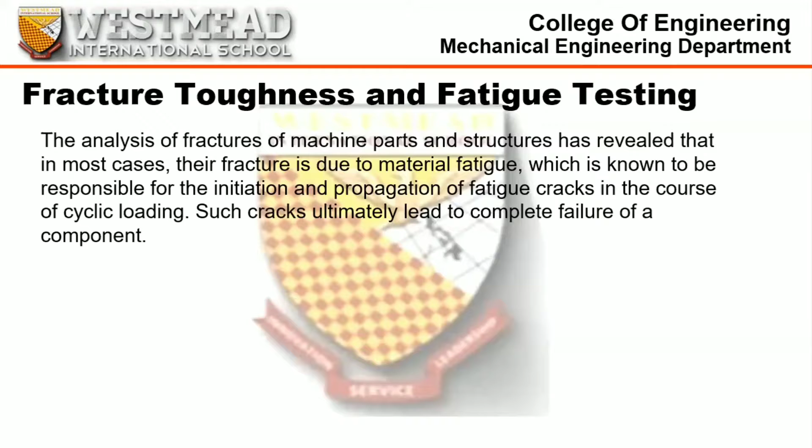A number of standardized tests have been devised to measure the fracture toughness values for structural materials. In the United States, these standard test methods are developed by the ASTM, known as the American Society for Testing and Materials.

Procedures and specimen configurations for most tests are relatively complicated, and we will not attempt to provide detailed explanations. In brief, for each test type, the specimen of specified geometry and size contains a pre-existing defect, usually a sharp crack that has been introduced. The test apparatus loads the specimen at a specified rate and also measures load and crack displacement values. Data are subjected to analysis to ensure that they meet established criteria before the fracture toughness values are deemed acceptable.

Most tests are for metals, but some have also been developed for ceramics, polymers, and composites.

So what is impact testing? Fracture mechanics is a scientific discipline. Impact testing techniques were established to ascertain the fracture characteristics of materials at high loading rates. It was realized that the results of laboratory tensile tests at low loading rates could not be extrapolated to predict fracture behavior. For example, under some circumstances, normally ductile metals fracture abruptly and with very little plastic deformation under high loading rates.

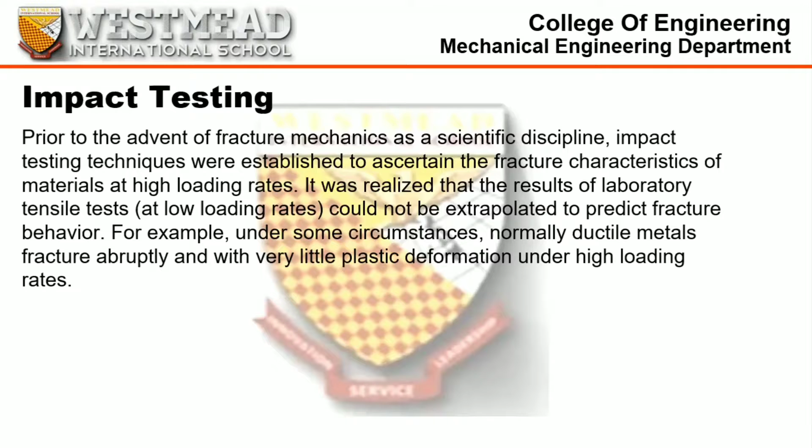Impact test conditions were chosen to represent the most severe conditions related to the potential for fracture. The first one is deformation at a relatively low temperature. The second is a high strain rate, for example the rate of deformation. And the last one is the triaxial stress state, which may be introduced by the presence of a notch.

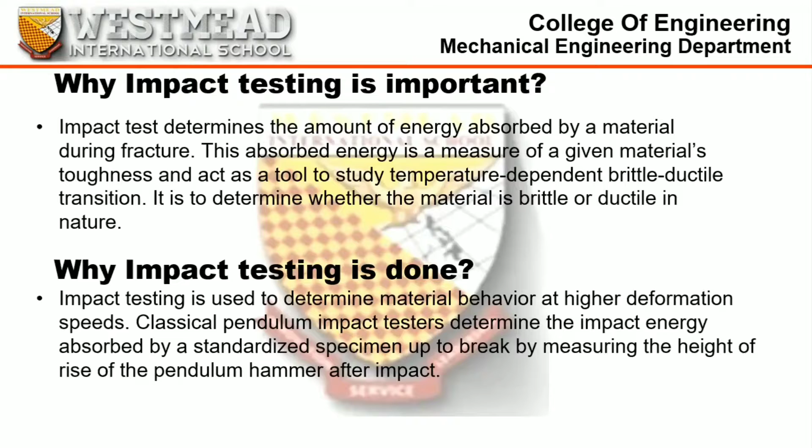Why is impact testing done? Impact testing is used to determine material behavior at higher deformation speeds. Classical pendulum impact testers determine the impact energy absorbed by a standardized specimen up to break by measuring the height of rise of the pendulum hammer after impact.

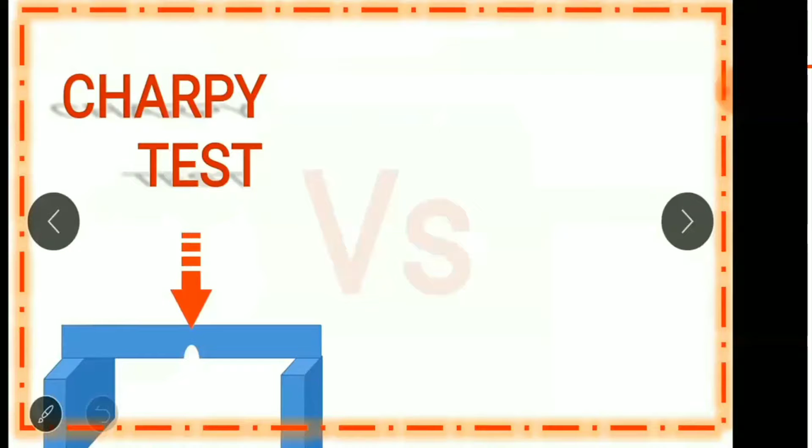Types of impact testing. There are two kinds of impact testing, the Izod test and the Charpy test. In this video, I will discuss with you the difference between these two tests.

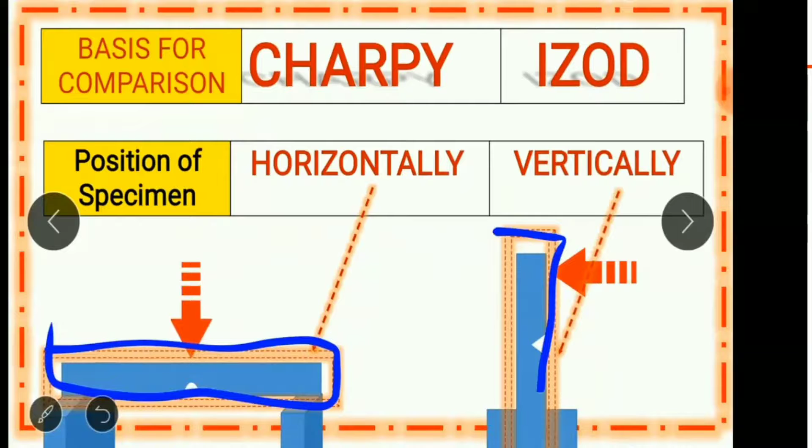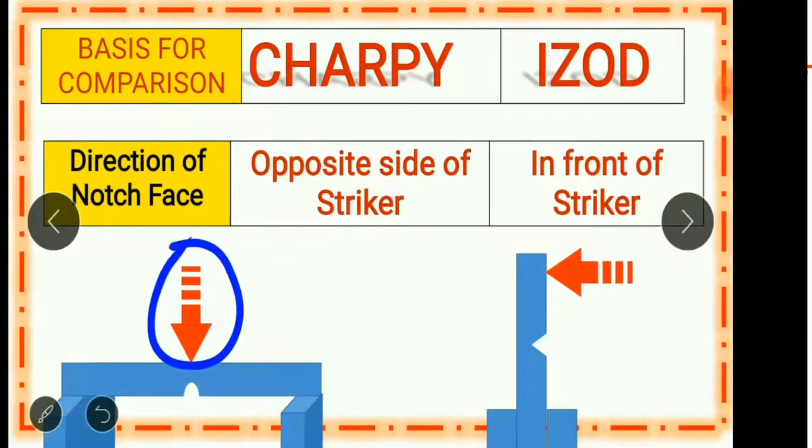Based on the direction of the notch face, the Charpy test has the notch on the opposite side of the striker, while on the Izod test, the notch is in front of the striker, or on the same side.

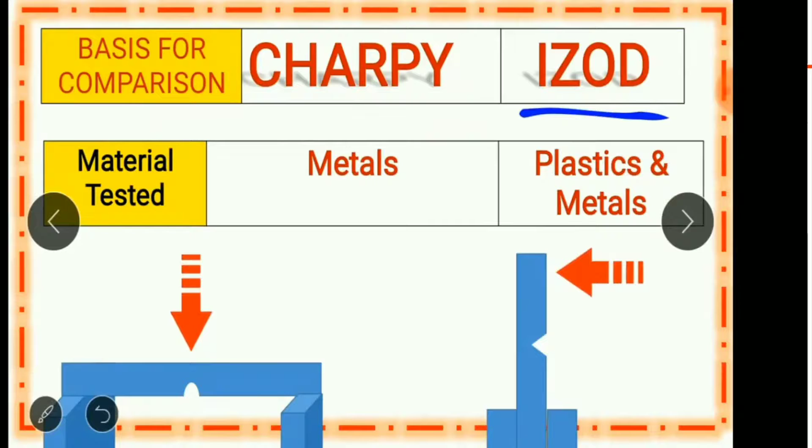The ductile to brittle transition is related to the temperature dependence of the measured impact energy absorption. This transition is represented for a steel by a curve. At a higher temperature, the CVN energy is relatively large, corresponding to a ductile mode of fracture. As the temperature is lowered, the impact energy drops suddenly over a relatively narrow temperature range. Below that range, the energy has a constant but small value, meaning the mode of fracture is brittle.

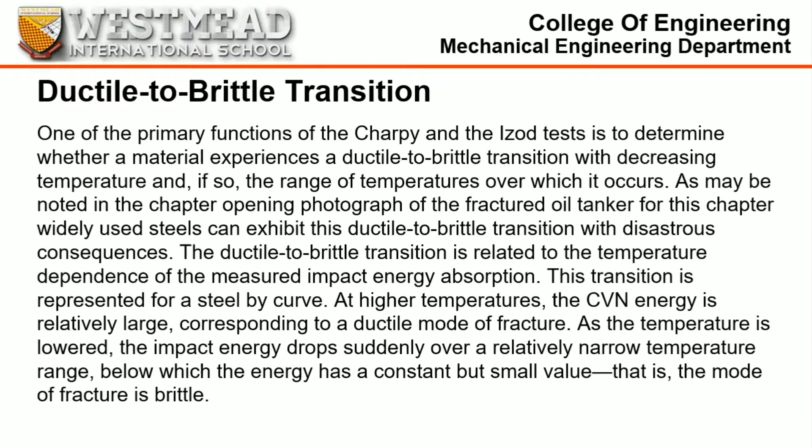This means the ductile to brittle transition is affected by temperature. As the temperature goes lower, the impact energy drops suddenly. This graph represents the ductile to brittle transition, showing the energy absorbed on impact against temperature.

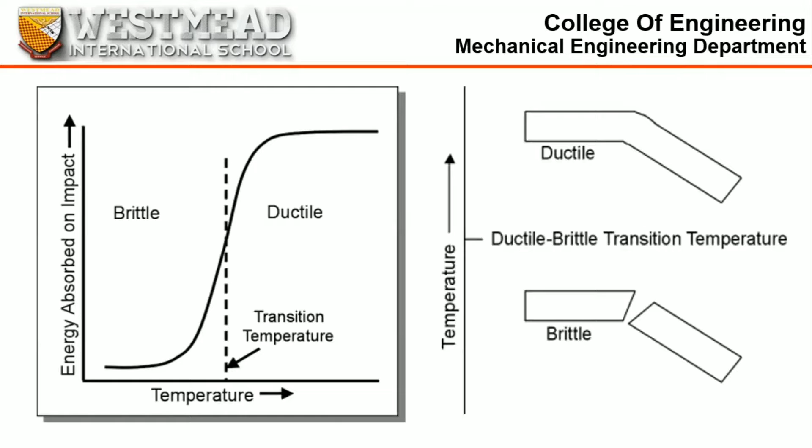At low temperatures, some metals that would be ductile at room temperature become brittle. This is known as the ductile to brittle transition. The transition temperature is strongly dependent on the composition of the metal. Steel is the most commonly used metal that shows this behavior. For some steels, the transition temperature can be around 0 degrees Celsius, and in winter, the temperature in some parts of the world can be below this. As a result, some steel structures are very likely to fail in winter.

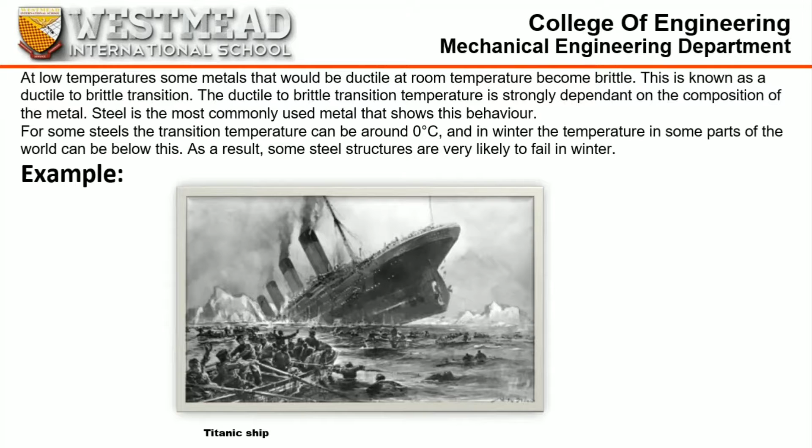The next topic is destructive testing. Destructive testing is undertaken in order to understand a specimen's performance or material behavior. These procedures are carried out to the point of the test specimen's failure. Destructive testing procedures can either follow specific standards or can be tailored to a particular set of service conditions. Destructive testing methods are commonly used for materials characterization, fabrication validation, failure investigation, and engineering critical assessments.

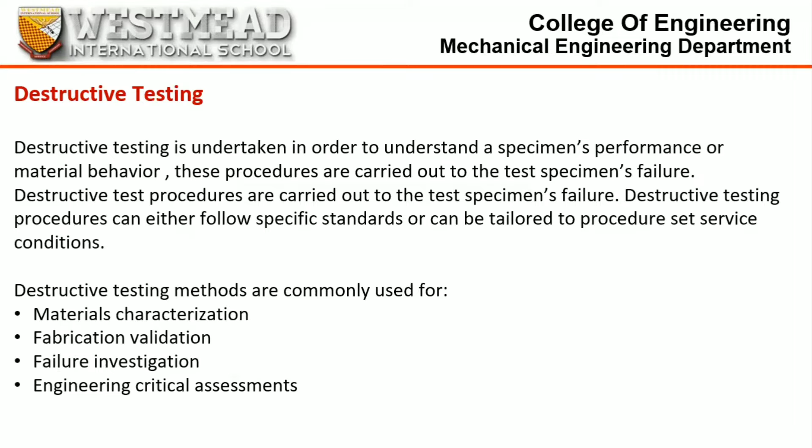Types of destructive testing: the first one is aggressive environment testing. This includes fracture and fatigue testing in sour, sweet, and other corrosive environments, across a range of temperatures and pressures. These tests allow industries to assess the impact of these conditions on material performance.

The next one is corrosion testing. This covers non-toxic, small-scale, aqueous corrosion testing in a variety of different environments, including fresh and seawater.

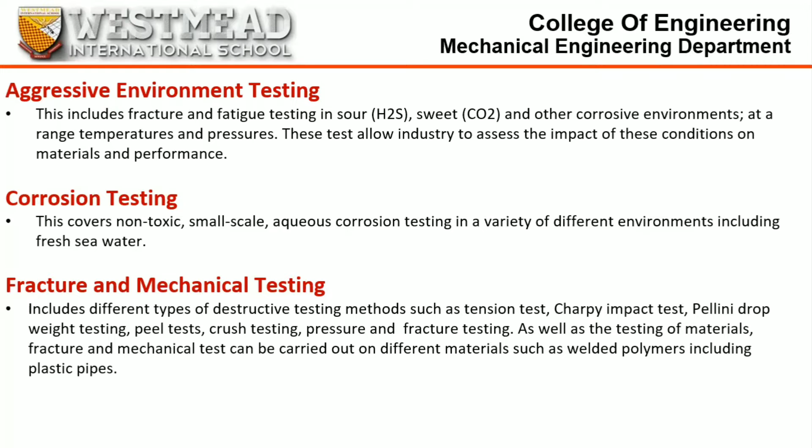Fracture and mechanical testing includes different types of destructive testing methods such as tension test, Charpy impact test, Pellini drop weight testing, peel tests, crush testing, pressure and fracture testing, as well as testing of materials. Fracture and mechanical tests can be carried out on different materials such as welded polymers, including plastic pipes.

Fatigue testing is performed in air or seawater environments. These tests are used to assess parent materials and the endurance of welded joints under constant or variable amplitude loading. These destructive testing methods can also be used for fatigue crack growth testing of welds, base metals, and heat-affected zones.

The next one is hydrogen testing. This type of testing covers materials that are at risk of corrosion from exposure to hydrogen, similar to corrosion testing. This test can be carried out at a variety of different temperatures and strain rates.

The last one is residual stress measurement. Residual stresses are those that remain in a solid material after the original causes of any stresses have been removed. This can be intentional, such as with scratch-resistant glass on smartphones, or unintentional, which can lead to premature failure of a structure. Measurement of residual stresses allows designers and engineers to determine factors like near-surface and through-thickness residual stress distribution, which can be used in engineering critical assessments.

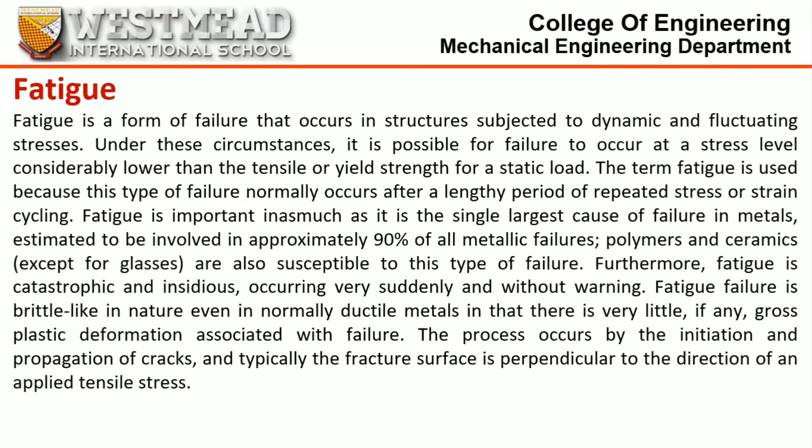Fatigue properties of materials are often described by the fatigue limit or the S-N curve. This is the S-N curve, or the Wöhler curve. It describes the relation between cyclic stress amplitude and number of cycles to failure. S-N curves are derived from the fatigue test. The tests are performed by applying cyclic stress with a constant amplitude on the specimen until failure of the specimen.

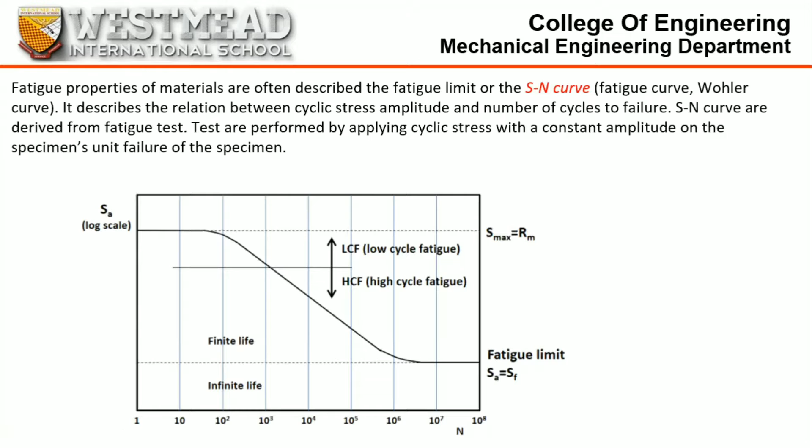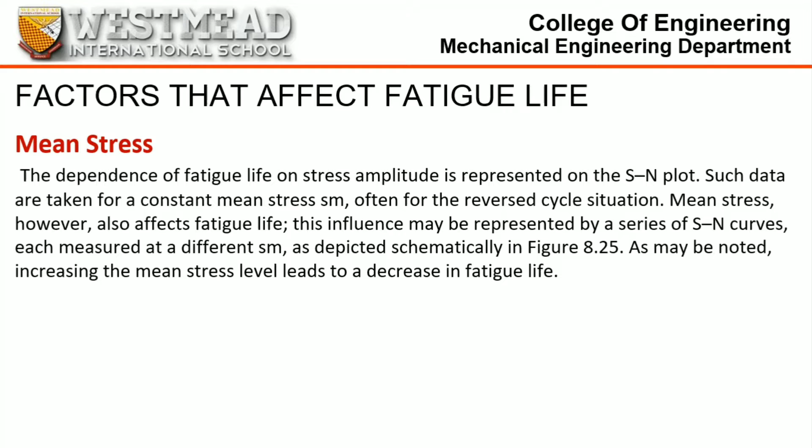The next one is the surface effects. For many common loading situations, the maximum stress within a component or structure occurs at its surface. Consequently, most cracks leading to fatigue failure originate at surface positions, specifically stress amplification sites. Therefore, it has been observed that fatigue life is especially sensitive to the condition and configuration of the component surface. Numerous factors influence fatigue resistance, the proper management of which will lead to an improvement in fatigue life. These include design criteria as well as various surface treatments.

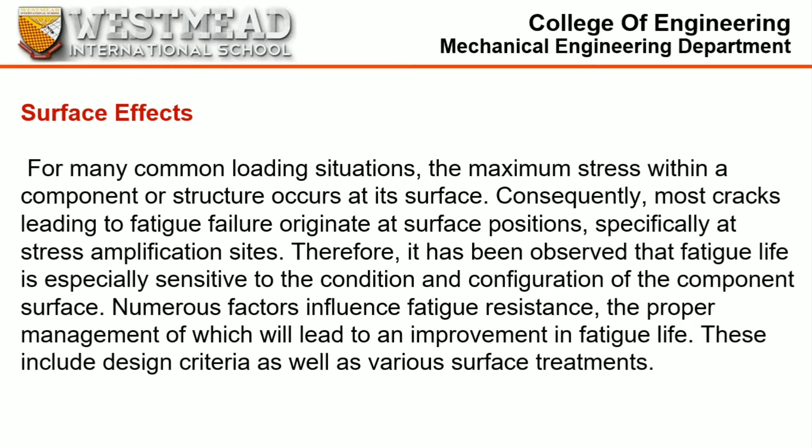Next is the design factors. The design of a component can have a significant influence on its fatigue characteristics. Any notch or geometrical discontinuity can act as a stress raiser and fatigue crack initiation site. These design features include grooves, holes, keyways, threads, and so on. The sharper the discontinuity, for example, the smaller the radius of curvature, the more severe the stress concentration.

The probability of fatigue failure may be reduced by avoiding these structural irregularities or by making design modifications by which sudden contour changes leading to sharp corners are eliminated. For example, calling for rounded fillets with large radii of curvature at the point where there is a change in diameter for a rotating shaft.

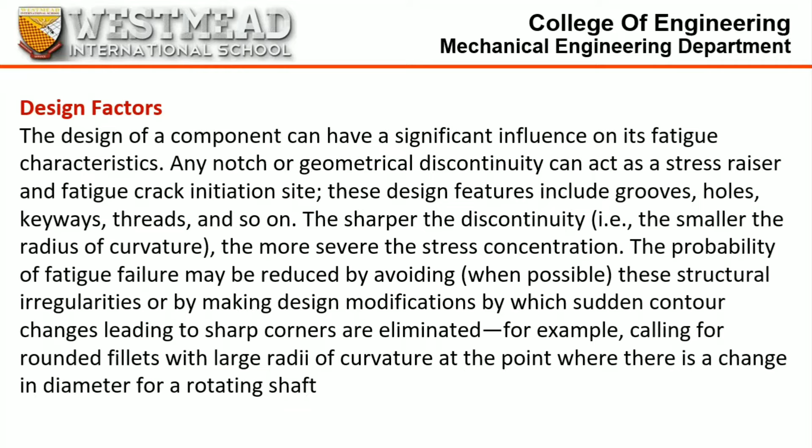Surface treatments. During machining operations, small scratches and grooves are invariably introduced into the workpiece surface by cutting tool action. These surface markings can limit the fatigue life. It has been observed that improving the surface finish by polishing enhances fatigue life significantly.

One of the most effective methods of increasing fatigue life performance is by imposing residual compressive stresses within the outer surface layer. Thus, a surface tensile stress of external origin is partially nullified and reduced in magnitude by the residual compressive stress. The net effect is that the likelihood of crack formation and therefore of fatigue failure is reduced.

Residual compressive stresses are commonly introduced into ductile metals mechanically by localized plastic deformation within the outer surface region. Commercially, this is often accomplished by a process termed shot peening. Small, hard particles of diameters within the range of 0.1 to 1.0 mm are projected at high velocities onto the surface to be treated. The resulting deformation induces compressive stresses to a depth of between 1/4 and 1/2 of the shot diameter. The influence of shot peening on the fatigue behavior for steel is demonstrated schematically.

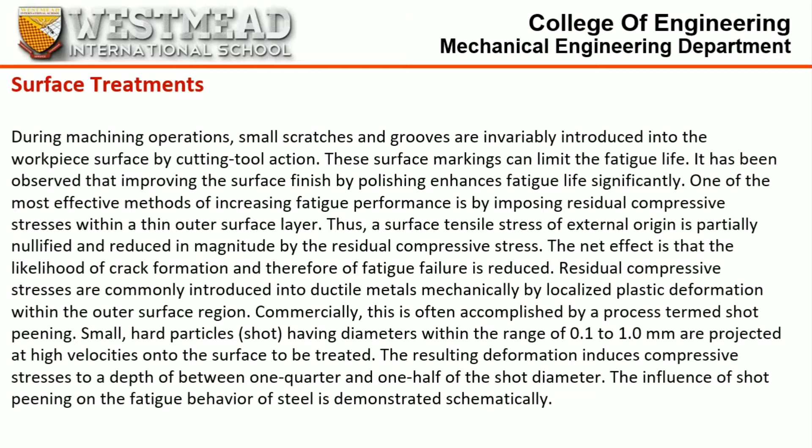Fatigue testing. It is defined as the process of progressive, localized, permanent structural change occurring in material subjected to conditions that produce fluctuating stresses and strain at some point or points that may culminate in cracks or complete fracture after a sufficient number of fluctuations.

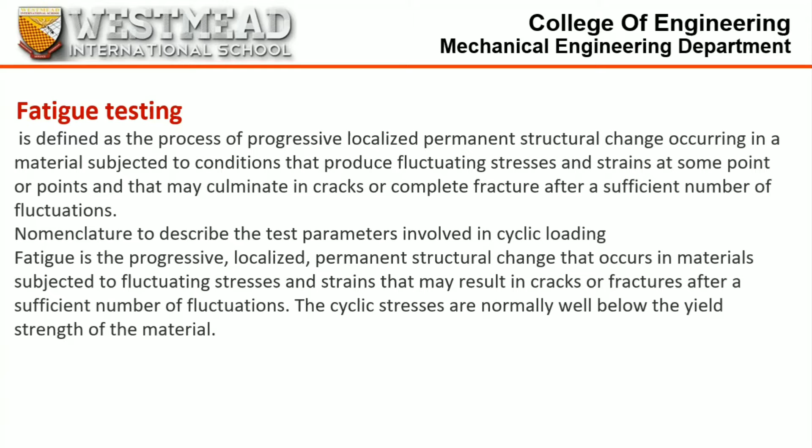Nomenclature to describe the test parameters involved in cyclic loading. Fatigue is the progressive, localized, permanent structural change that occurs in material subjected to fluctuating stress and strains that may result in cracks or fracture after a sufficient number of fluctuations. The cyclic stresses are normally well below the yield strength of the material.

The process of fatigue consists of three stages. The first stage is the initial fatigue damage leading to crack nucleation and crack initiation. The second stage is the progressive cyclic growth of a crack, or crack propagation, until the remaining uncracked cross-section of a part becomes too weak to withstand the loads applied. And the last stage is the final or sudden fracture of the remaining cross-section.

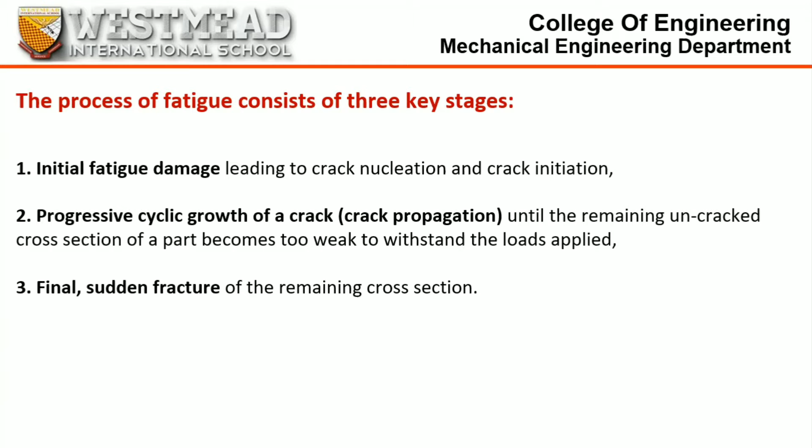These are the types of fatigue failure: mechanical fatigue, creep fatigue, thermomechanical fatigue, corrosion fatigue, and fretting fatigue. Mechanical fatigue is the fluctuations in externally applied stresses or strains, while creep fatigue is the cyclic loads at high temperatures.

Thermomechanical fatigue is the fluctuations in temperature as well as the stresses and strains. Corrosion fatigue is the cyclic loads in a chemically aggressive or embrittling environment. Fretting fatigue is the cyclic loads combined with frictional sliding.

Cyclic loading generally produces failure however low the stress may be. However, with some materials the S-N curve levels off, suggesting that for these materials, a limit of stress can be specified, known as the fatigue limit, below which infinite life can be expected. The fatigue limit is thought to be associated with the phenomenon of strain aging.

Most non-ferrous alloys do not show a fatigue limit. Instead, their S-N curve continues to drop at a slow rate, as in the dotted line. For these types of materials, the fatigue strength is quoted. This is the value of stress to which the material can be subjected for a given number of cycles.

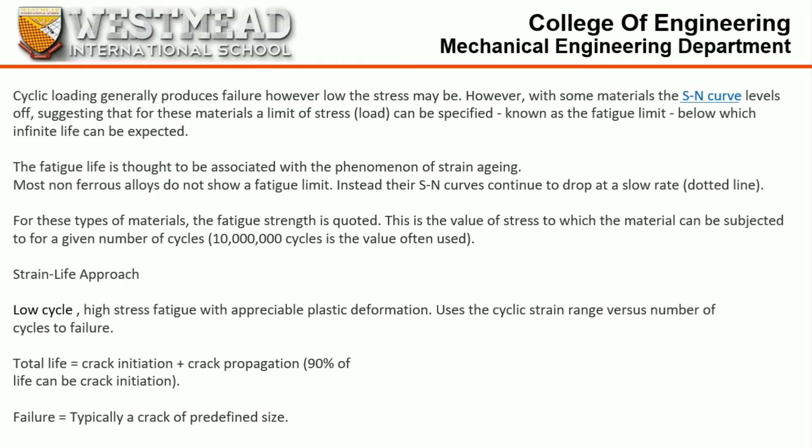Strain life approach. Low cycle, high stress fatigue with appreciable plastic deformation. So pag low cycle daw ay high ang stress fatigue. Uses the cyclic strain range versus number of cycles to failure. Total life is equal to crack initiation plus crack propagation. Failure is typically a crack of predefined size.

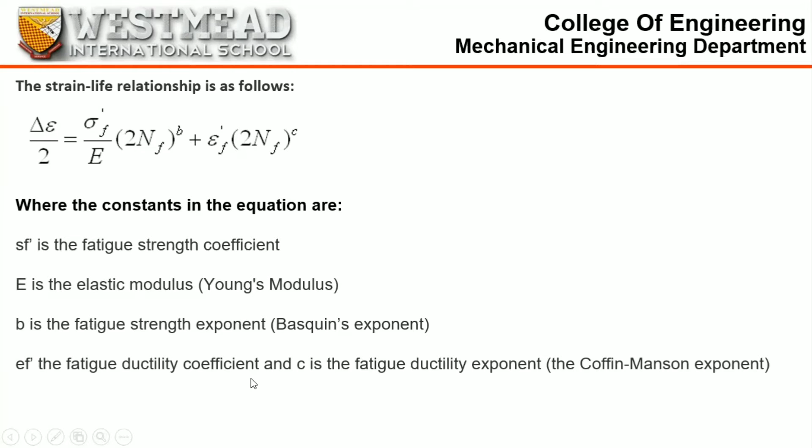The strain life relationship is as follows. So ito yung formula niya. Where the constants in the equation are: σf is the fatigue strength coefficient, E is the elastic modulus, b is the fatigue strength exponent, εf is the fatigue ductility coefficient, and c is the fatigue ductility exponent.

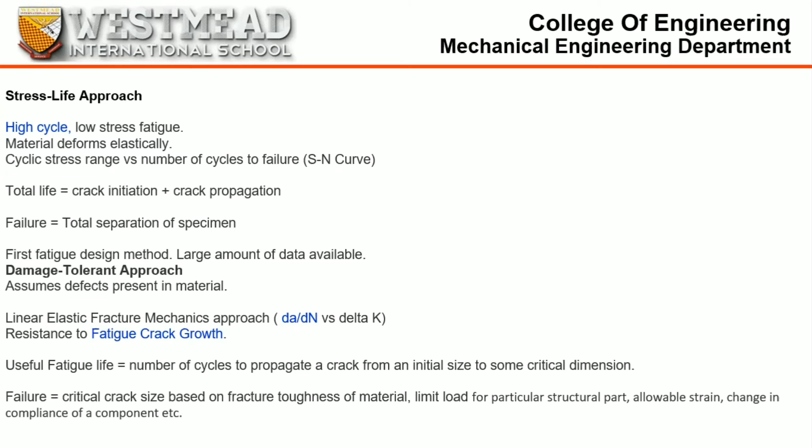For a clearer idea about fatigue and fatigue testing, here is a video presentation for you.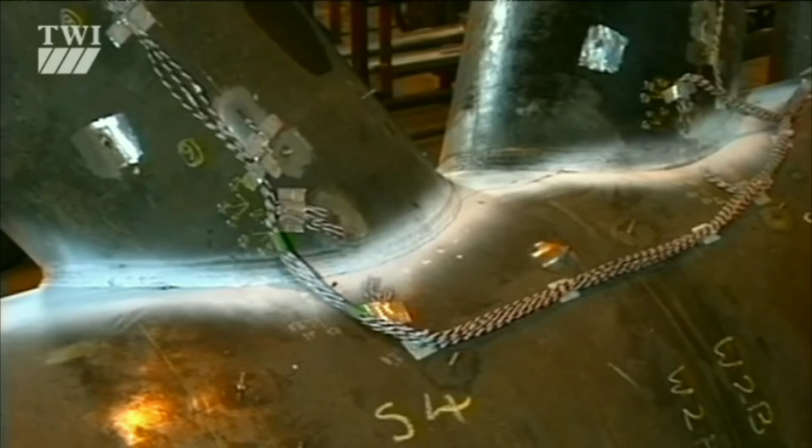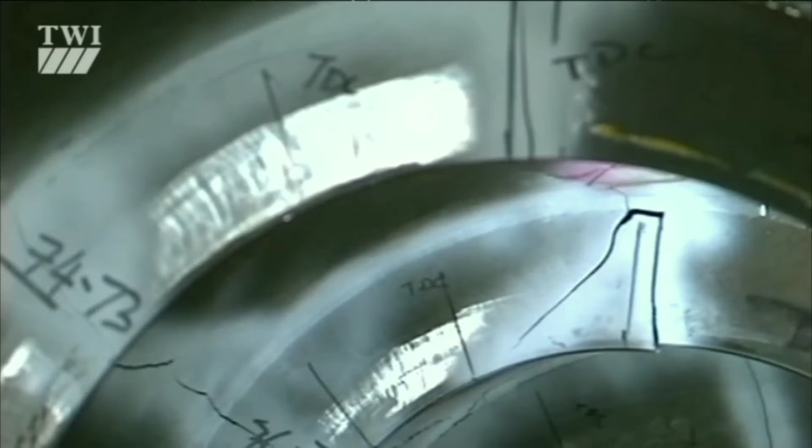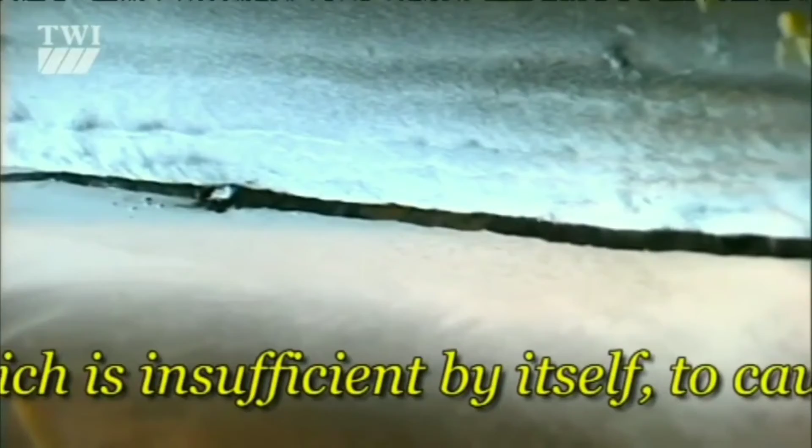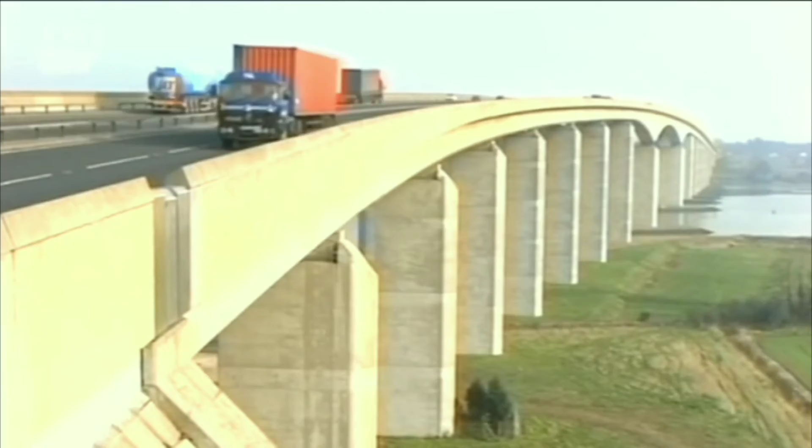Fatigue, variously defined as exhausting the strength or power of recovery, the deterioration of a material under repeated loading, and in the structural sense, the formation of a crack or cracks as a result of the repeated application of loads, each of which is insufficient by itself to cause normal static failure. Not one loading cycle, not 100 or a few thousand, but possibly millions and millions during the life of the structure. Examples exist throughout engineering. Structures large and small, dynamic and static. They all endure fatigue loading, and as such, have a fatigue life.

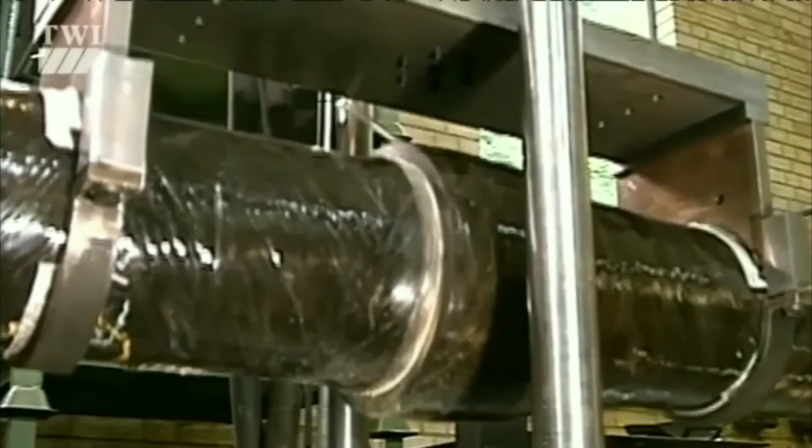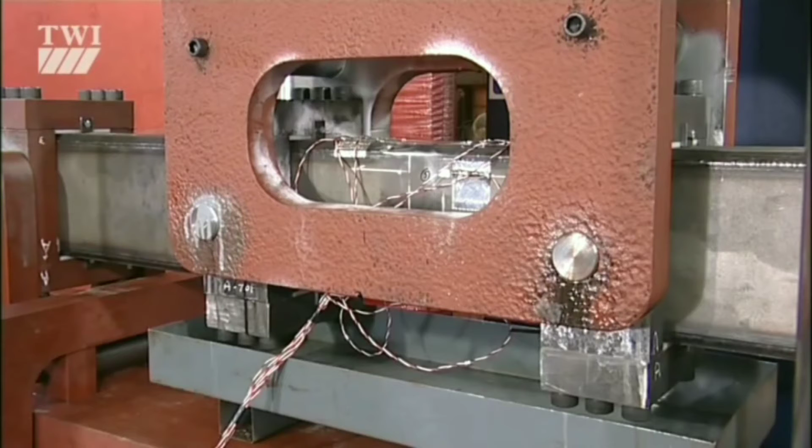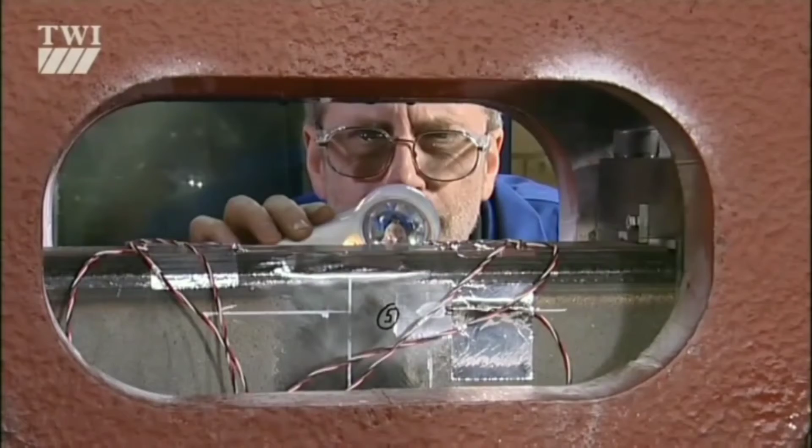We can examine fatigue cracking safely in controlled laboratory conditions. Take this beam, for instance, a model box girder in a 4-point bending test. The test machine applies a preset load once every 5 seconds. Now, although the stress developed is easily within the elastic range of the material, and the load sustained safely, repetition of the stress ultimately leads to cracking, often at welded joints. Because they appear after repeated loading, they're known as fatigue cracks.

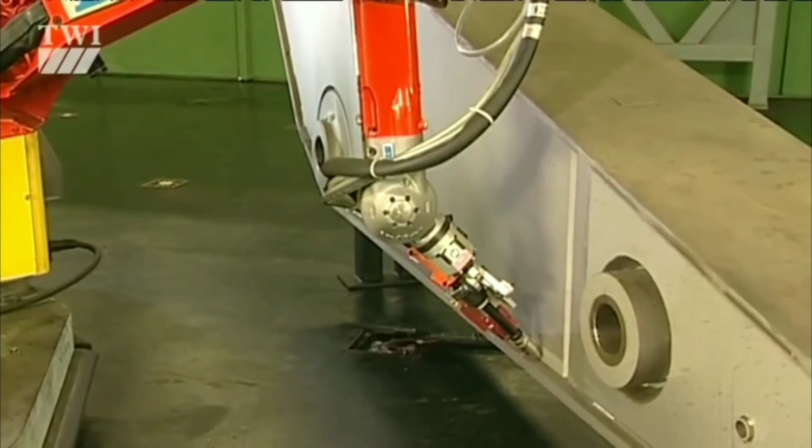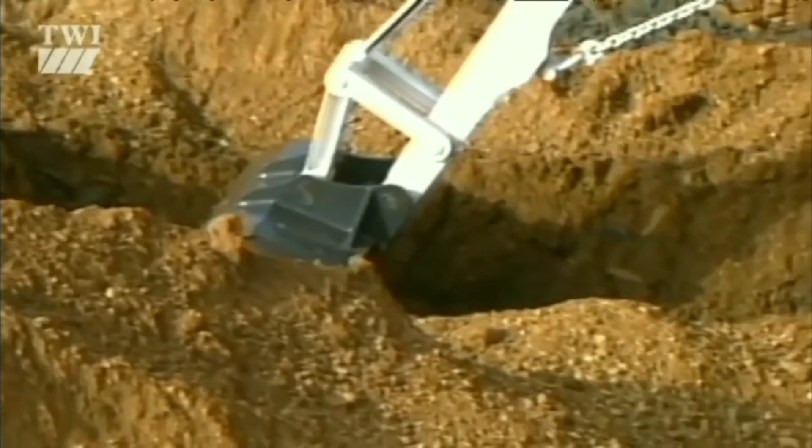Excavator components are largely welded fabrications. Parts are tacked together, then fully welded using MIG or submerged arc welding. In service, they're subjected to a heavy load every time the bucket digs into the ground, which, as we see, is pretty frequently. So the component's design, welding and inspection must reflect this fatigue loading.

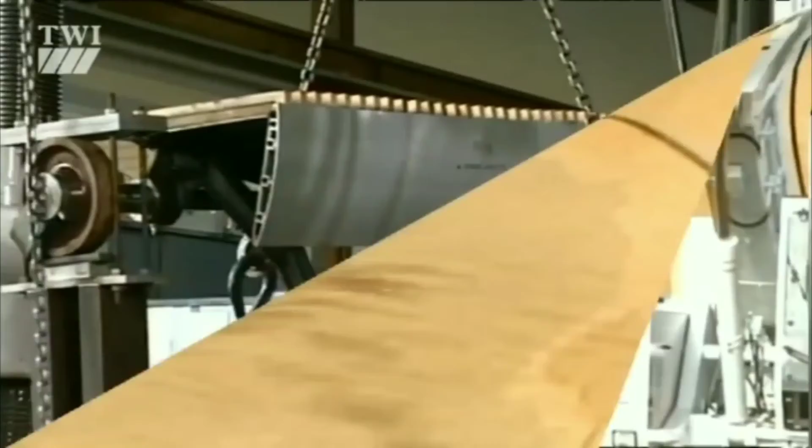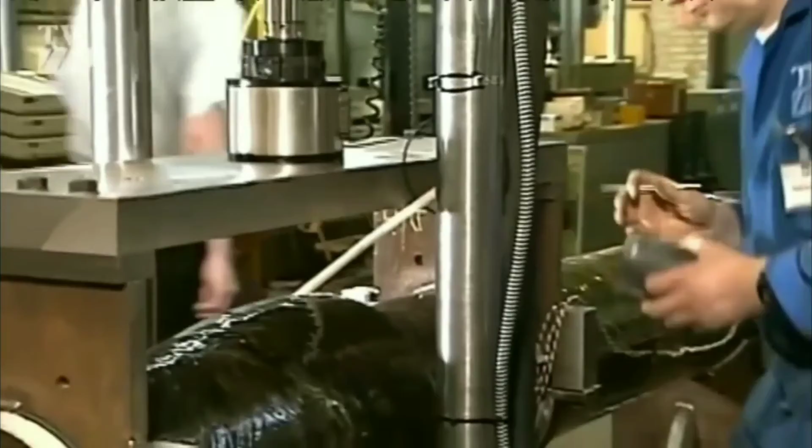Small portable parts can be tested in the severest conditions in the lab. But if the job is large and in full-time service, like a bridge support, a pipeline or an aircraft wing, then that's impossible. We need information at the design stage to predict the likely fatigue, wear and corrosion behavior of the structure. And we can gather this by laboratory tests of individual welded joints.

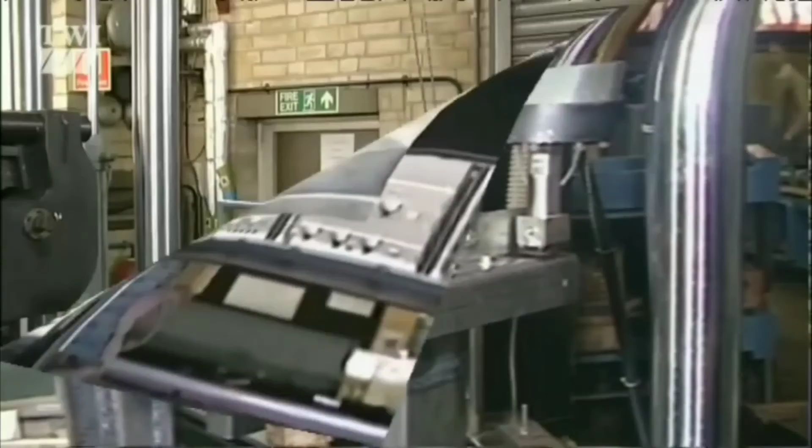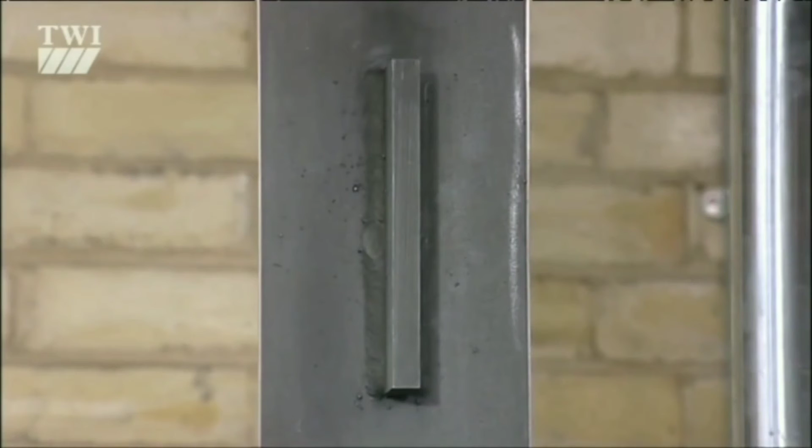Here we use a flat plate in simple tension with attachments on either side. The longitudinal fillet welds contribute little, but we'll see they pose a significant threat to the fatigue life of the specimen. But first, a simple tensile test. Elastic deformation is followed by plastic deformation, necking becomes evident and ductile rupture occurs at a load corresponding to the material's tensile strength. It leaves a characteristically irregular fracture surface.

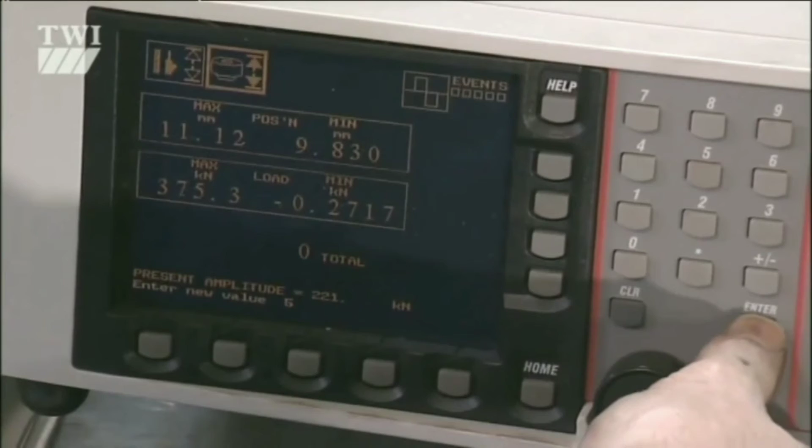Now, contrast this with a similar specimen in a fatigue test. A cyclic tensile stress is applied hydraulically. Eventually, it causes fatigue cracking, just here at the end of the weld. But the crucial thing is that this has happened at a stress well below the elastic limit. Here, fatigue cracking appears at the weld toe because of the local stress concentrations and also small weld imperfections.

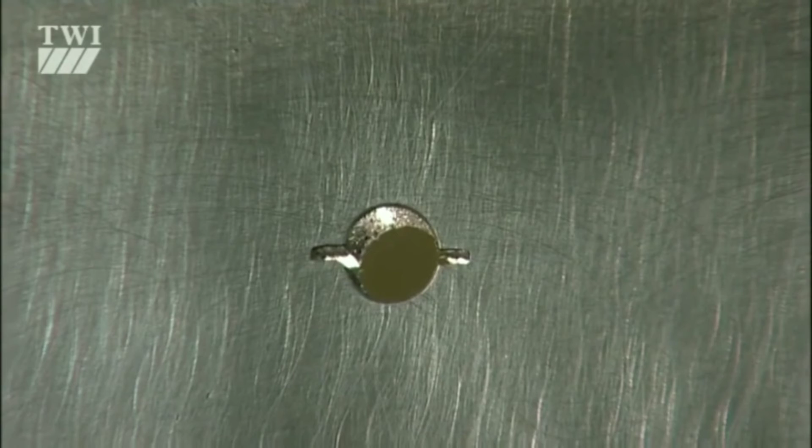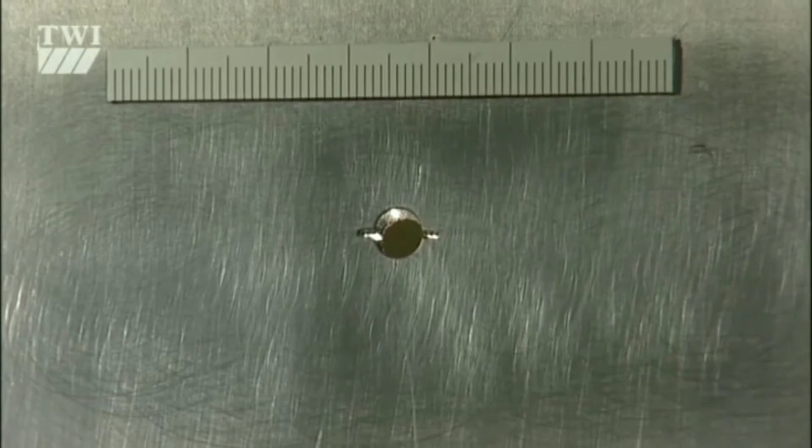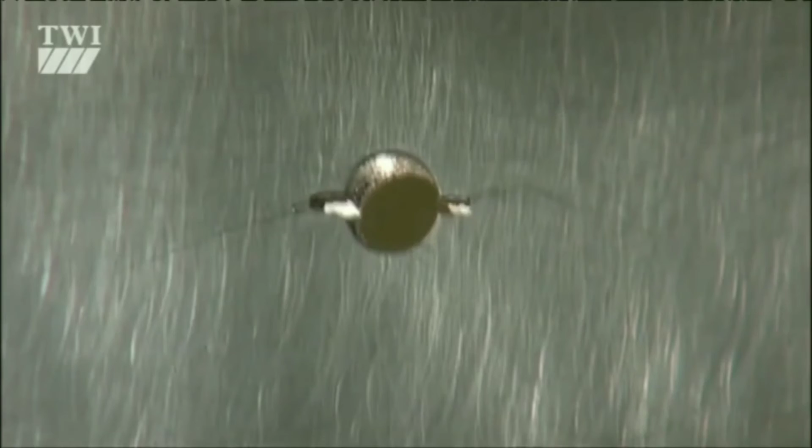We can clearly watch a fatigue crack growing by testing this aluminium plate specimen in a fatigue test machine. By compressing time, we can speed up the view of crack growth. The test piece has an artificial stress concentration so that the crack is located accurately. By polishing the surface, we can see the crack propagate. First 10 millimeters, then 30 millimeters, to final failure.

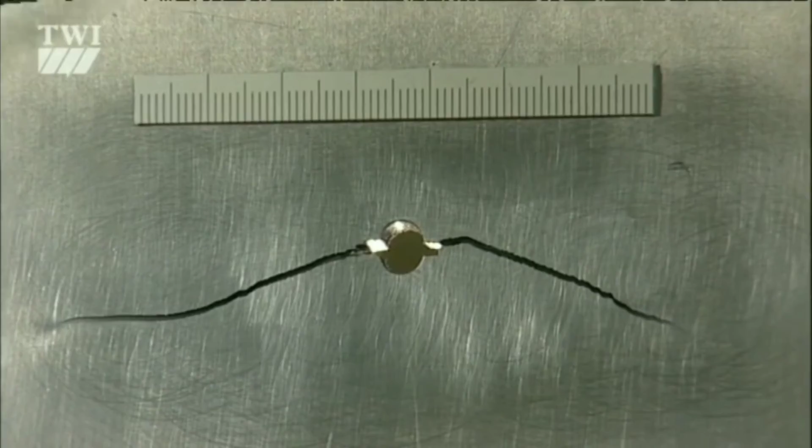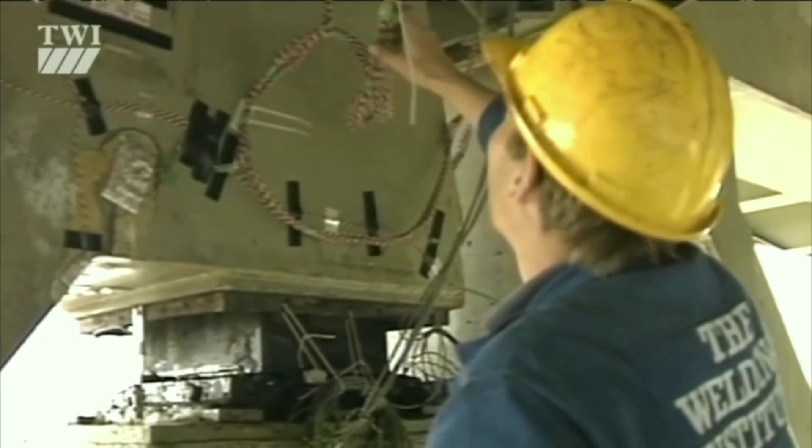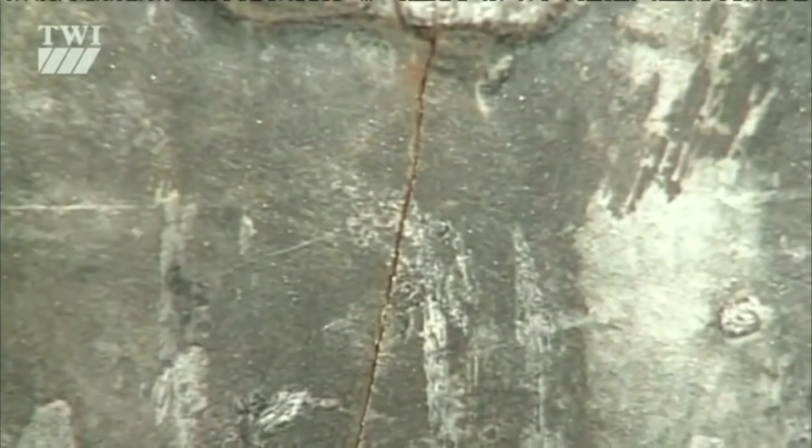So, in service, it's important to inspect for evidence of fatigue early in a structure's life, close to load-carrying members where the cross-section changes abruptly. Of course, rust, dirt or paint can make this site job a tough and onerous one. If it's not spotted, a crack will grow progressively until the remaining cross-section can no longer support the force applied and rapid ductile or brittle fracture occurs.

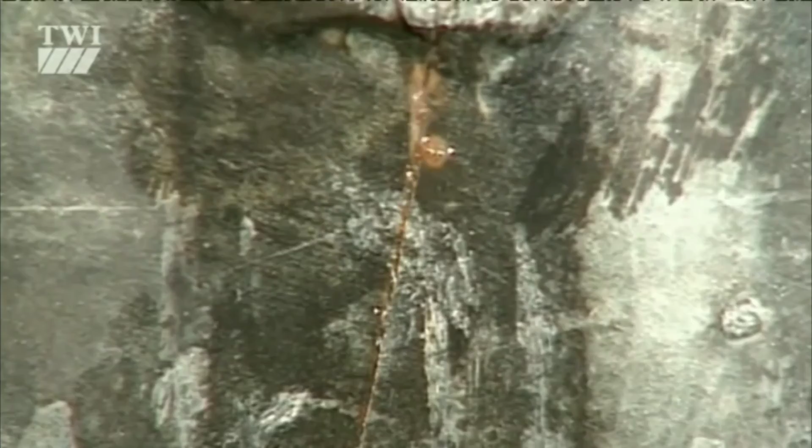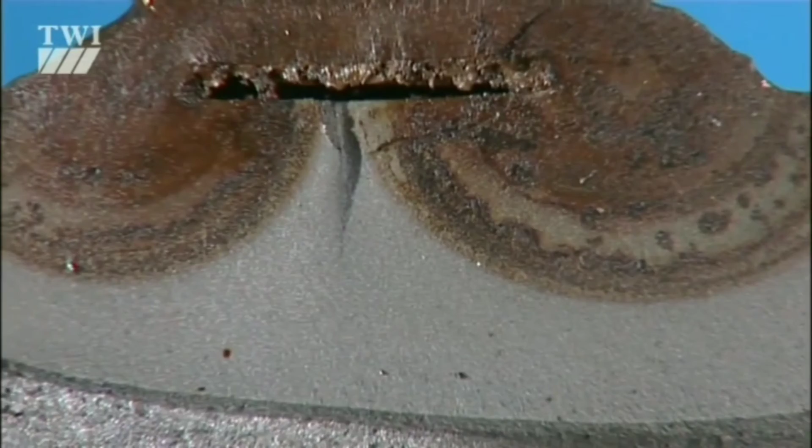Fatigue crack surfaces have a distinct look about them. A smooth appearance around the point of initiation and well-defined steps corresponding to the last few cycles just before fracture. In practice, a degree of redundancy is often present in engineered structures. So, a redistribution of stress takes place, and the propagation of a crack may be slowed down or even halted. There's no danger of collapse, but the structure's stiffness may have deteriorated to an unacceptable level.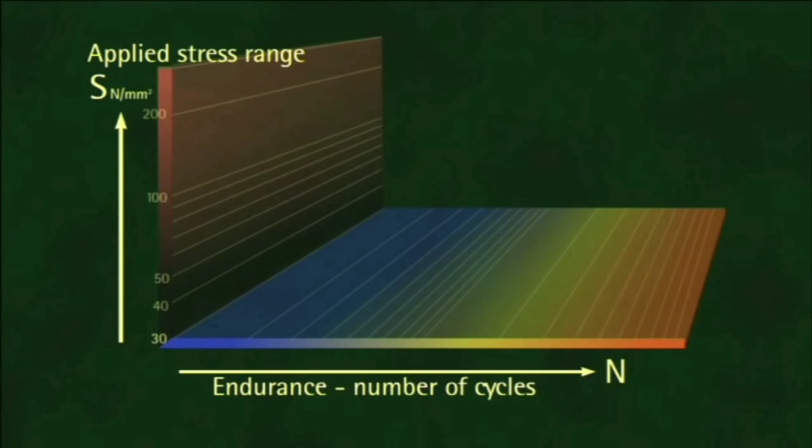What tests like this do is give a quantitative result of how many cycles produce a sizable crack. So we can now represent this graphically. Numbers of cycles, N, horizontally, and applied stress range, S, vertically. Log-log scales are used, with the horizontal scale up to 10 million cycles in this case. By testing several specimens at different stress levels, we can create a mean line for fatigue performance.

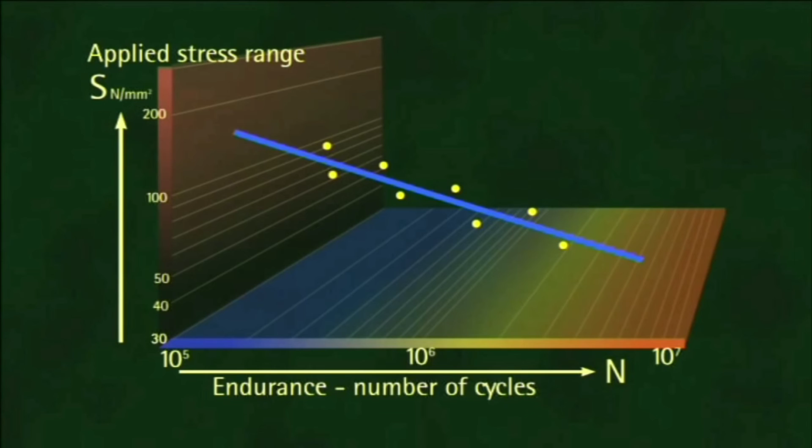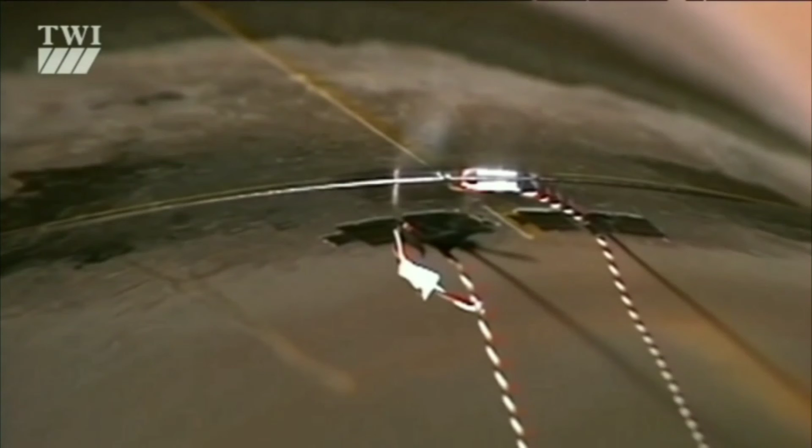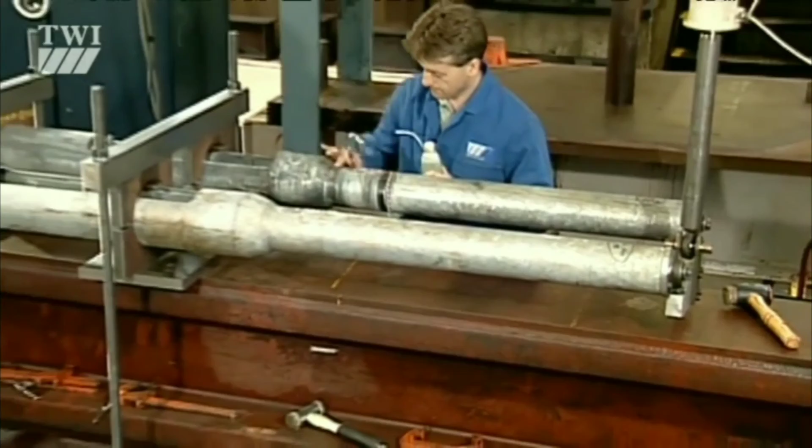The required life of the joint, expressed as a number of stress cycles, can be related to the allowable stress range for the particular joint. If the stress level is raised, a shorter life must be accepted, or, of course, the joint design changed. Different welded joint designs give different fatigue performances. The design of this lamppost, for instance, includes a stress concentrator, which has created a predictable fatigue behavior.